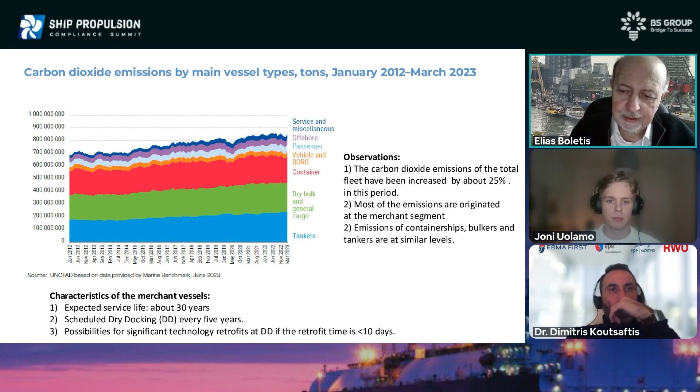So what we need to do is reduce these emissions and revert the trend, which indicates that in spite of the COVID period, the emissions are continuing to increase.

I have a slide which might be a little bit too busy, but it gives a very good overview of where we are in the marine sector: 37,000 ships, the overwhelming majority based on conventional fuels. Every year, what we supply as new is approximately 1,300 ships. So in order to replace the 37,000 ships with ships of new technology, it will take a considerable amount of time.

Another important comment is that if we look at fuel consumption, right now the conventional fuels consumption is 220 million tons per year. In order to replace that quantity with new synthetic fuels and so-called advanced low emission fuels like methanol, ammonia, and hydrogen, we would need very significant quantities. Clearly, in the year 2024, 2025, during our period, the availability of these fuels is the problem.

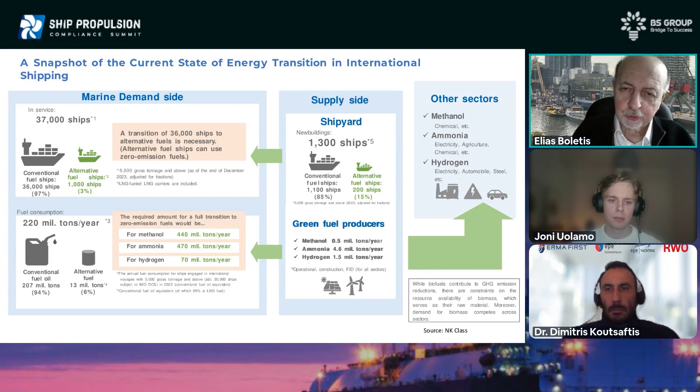So if we talk about changes in the marine sector, clearly the expectation that new fuels would solve the problem needs to be seen very carefully, because we are not producing enough green fuels to help invert the trend and improve the environmental performance of the marine sector. Moreover, several of those fuels are required also by other sectors, so we are not the only users of those fuels.

Clearly we see that the fuel transition will take some time, so we expect that new fuels will play a role, but also a lot of emphasis on other technical options shown in the middle of the slide, which include energy-saving technologies, wind assist propulsion, and onboard carbon capture and storage systems.

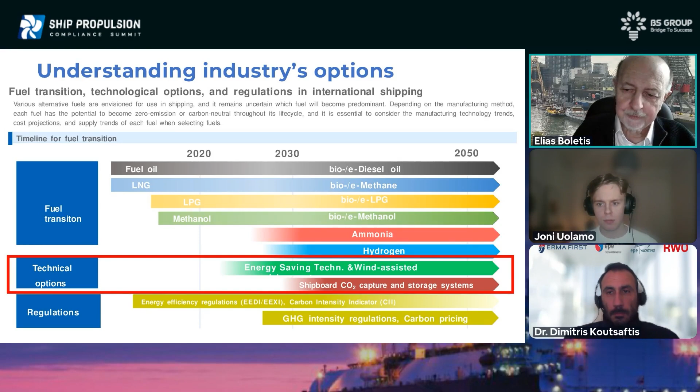Carbon capture and storage systems is the subject of today, and it is a way of improving the environmental performance of our vessels. If we see the situation with fuel and the increase in energy demand year by year, based on an assumption of this increase, clearly fossil fuel is going to stay for quite a significant amount of time.

So we don't replace the vessels fast. The new fuels, methanol, ammonia, are coming at the late side. The reduction of emissions needs to take place sooner, and the available solutions we have are indicated in the middle of the slide: carbon capture, energy efficiency improvement, biofuels, wind propulsion.

These are the solutions that we have in our hands. The solutions have two advantages: we can start immediately the decarbonization, we don't need to wait.

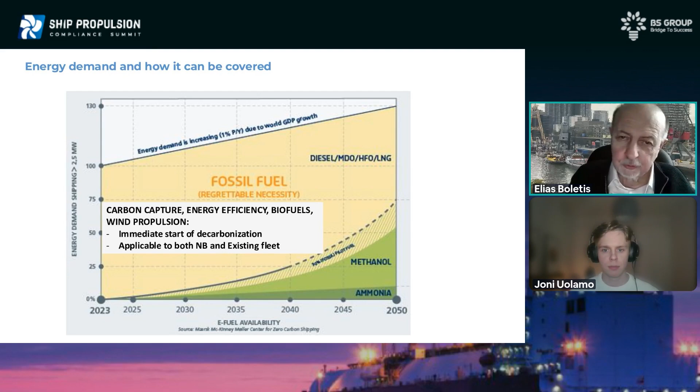The second fact is that they are applicable to both new built and existing vessels, because as we've seen earlier, 1,300 new vessels per year are not sufficient to change the trend. We need to do also actions on retrofitting to existing vessels.

If we see the legislation, it is distinguished by compliance measures like the IMO MARPOL carbon intensity indicator, where vessels are distinguished in 5 categories. We need to say that unfortunately till now the legislation has not advanced significantly to incorporate the onboard carbon capture rules. We are expecting that this will happen in early 2025.

But we see that the regulation is not helping us drive the activities correctly. The regulation will be arranged, will come, but we don't have right now the rules fully applicable.

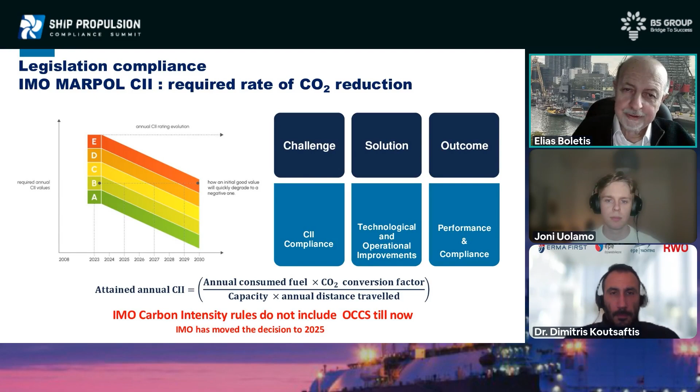If we see now the rules from the European Union, the legislation on the EU ETS that many of you are quite aware of: for the EU ETS, there is a provision that no allowances need to be paid for carbon capture, provided of course that a few measures are followed.

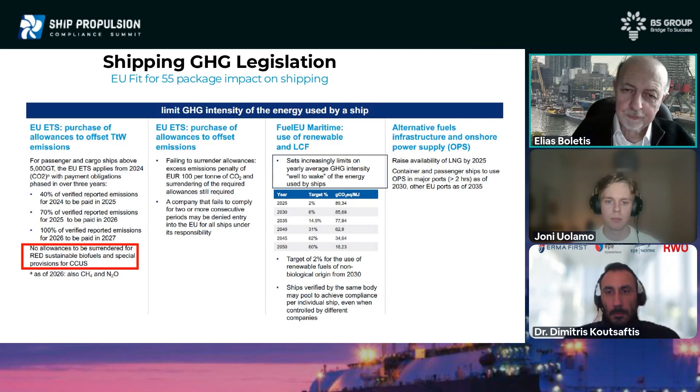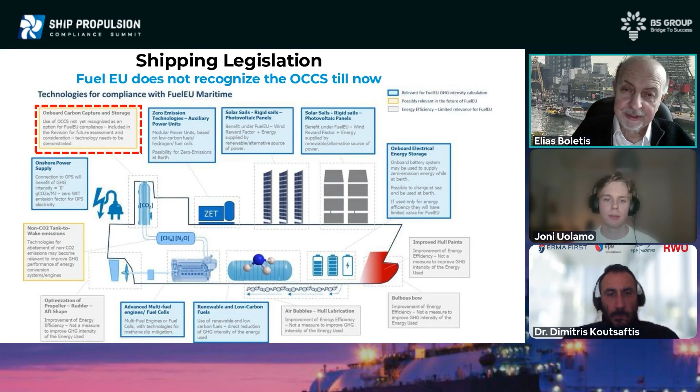So the EU ETS is recognizing carbon capture, but Fuel EU, unfortunately, is not yet recognizing carbon capture as a way of improving emissions. What I'm trying to say is that the legislation is underway, and we will need the legislation to support the actions for implementation of new technologies.

And it produces 3 times that quantity in carbon dioxide. 1 kilogram of fuel produces 3 kilos of carbon dioxide. That means this important aspect needs to be taken into account: you need to design the vessel correctly, and you need to be sure that the interaction between the engine, the other systems on the vessel, and the carbon capture works in the best way.

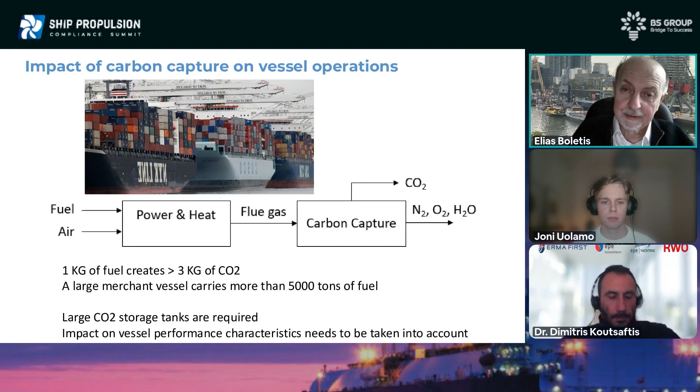Supporting the effort to capture and store the carbon on board of the vessel, so you need space. You also need to provide additional energy in many cases to be able to convert, to liquefy the gas, and all these are issues which need to be taken into account by all disciplines in the marine world.

There is a pre-combustion capture as a way forward. This is applicable only on LNG vessels. It's a solution for LNG, where actually the LNG, before entering into the engine, a partial quantity of the LNG can be converted to hydrogen. This creates carbon dioxide, which needs to be stored separately.

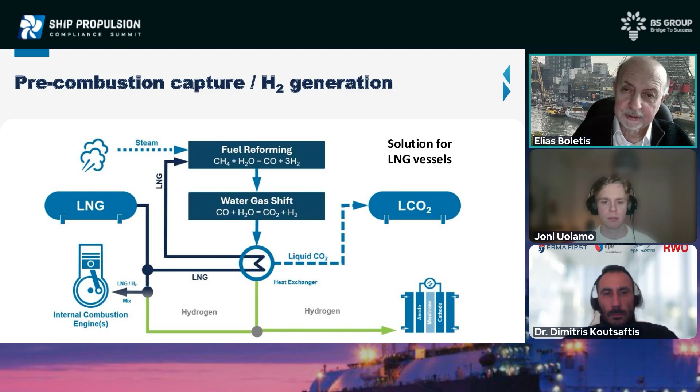But in our case, we are talking primarily about the post-combustion carbon capture, where the gas emitted from the main engine undergoes a process on board of the vessel, and then the carbon dioxide which is collected is stored separately.

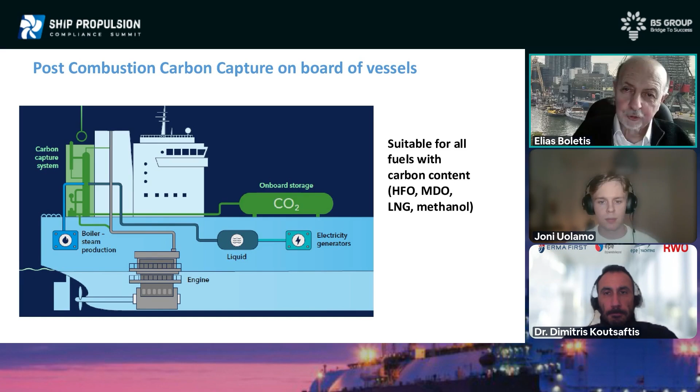So this is the main subject of the presentation of today, and the two presenters will give you quite a lot of details on the subject. I needed to mention that there are currently quite a number of pilot projects.

One of these projects is the project Remarccable. It is supported by a number of companies, you see the main parties involved at the upper side of the slide. What I would like to say, what has been shown and published from this work, is that in order to reduce the carbon dioxide, you need some additional energy.

So you are increasing the fuel consumption, and this is actually needed in order to liquefy the gas. At the end, you have a significant advantage of carbon capture reduction. However, you have also an increase on fuel consumption. How much is this increase?

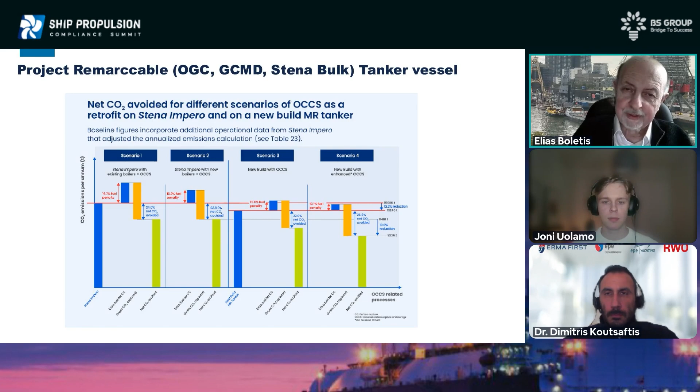This depends, of course, on the application, depends on the way that you have sized the system, and depends on the fact that on a new build, you have more opportunities than for a retrofit project where the systems are already sized. Personally, I've been involved in quite a few activities where we tried to find out the cost of the system relative to new alternative fuels.

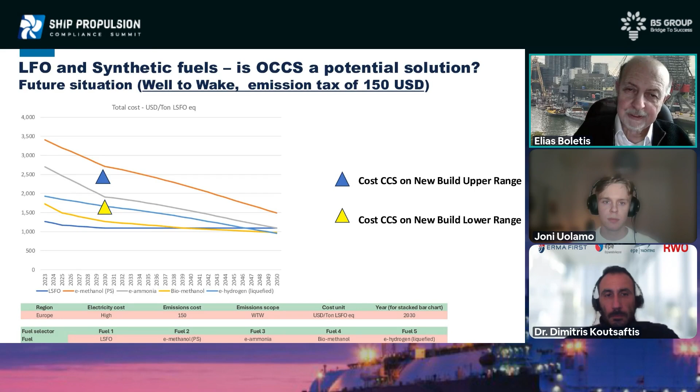So we did some work where the McKinsey Institute tool has been used, comparing the projection of the new synthetic fuels with carbon capture. So what we see is that the cost of carbon capture is an issue which needs to be addressed. We expect with the pilot projects that we have in front of us that the cost will be significantly reduced in the coming period. My personal view is that carbon capture, together with energy saving devices, can be integrated, providing a solution.

The actions can take place every 5 years when you have dry docking, where a combination of measures, where carbon capture certainly plays a potential role, can allow you to improve the vessel, reduce the carbon dioxide emissions, and fulfill the requirements of the authorities.

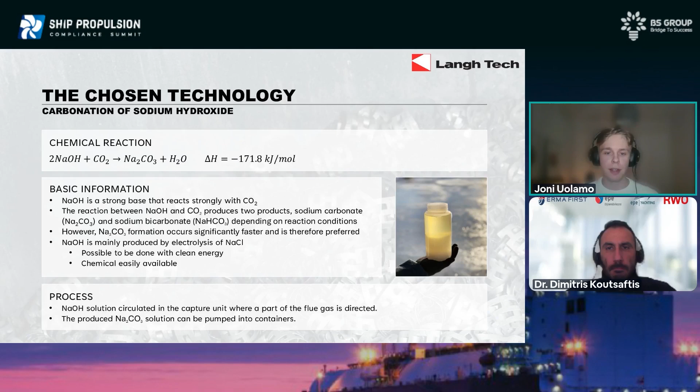But sodium carbonate is formed much faster, and the reaction kinetics for this reaction, which is shown here on the slide, is much faster, which really reduces the equipment size. Therefore, sodium carbonate is preferred in our technology. And one particularly important factor is that sodium hydroxide is produced by electrolysis of sodium chloride, which can then apply green electricity. And this is important from a life cycle assessment point of view.

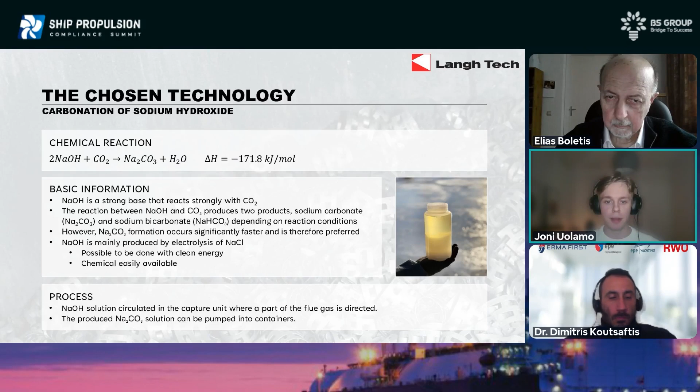So the process is rather simple. We have a capture unit where we direct a part of the exhaust gas, and then we have countercurrently flowing aqueous solution of sodium hydroxide, and they form together sodium carbonate in the capture system. What can you do with the product sodium carbonate then? Well, there are a number of industrial applications for this product, for example, in glass manufacturing, detergents, pH regulation, water softening, and exhaust gas cleaning.

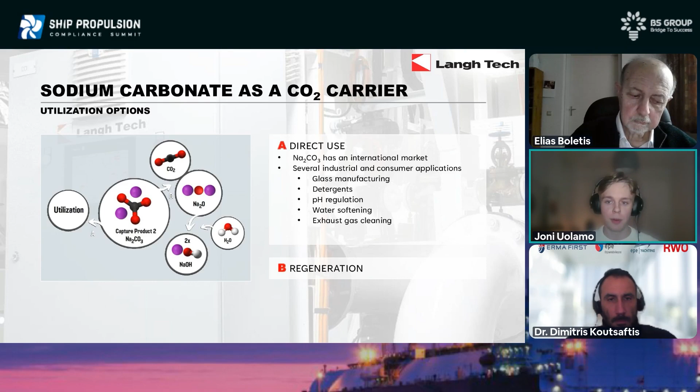And exhaust gas cleaning means in this context, for example, so-called waste-to-energy plants, where you burn plastic waste, low purity fuels, basically, and they can form different kinds of acidic components in the exhaust gas, and they have to be neutralized some way. So that is a particularly interesting way of utilizing sodium carbonate, because the product purity requirements are rather low as well.

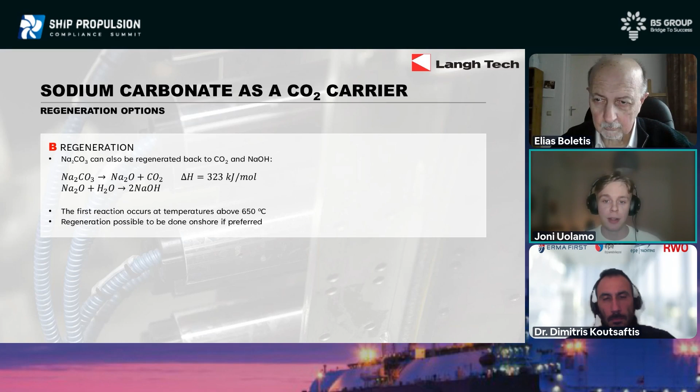The second option is, of course, regeneration, which can be done on land. And this is shown here in these two reactions. First, you decompose the sodium carbonate, and then you dissolve the sodium oxide in water, forming sodium hydroxide again, which can be further used to capture more CO2. But this first reaction requires rather high temperatures, and due to the market value of the sodium carbonate which is produced, we have been focusing on a carbon capture and utilization concept where you can sell the product. This also makes sense from an economical perspective.

Some technical details and numbers of our technology. So basically, because we are not regenerating the solvent, we always need more sodium hydroxide to capture more CO2. And this number is given here on the left-hand side. You need around 3.6 tons of 50% industrial solution of sodium hydroxide to capture 1 ton of CO2. And at the same time, you produce 30% solution sodium carbonate in an amount of 8 tons per ton CO2.

We have a pilot plant on one of Langh's vessels, and we have been operating with it since last spring. And these tests have shown that the energy that is required for the capture step falls into this range. And this is quite marginal due to the fact that we do not regenerate the solvent and we do not compress the CO2. So this includes basically the exhaust gas fan and then the liquid circulation pump. And this all leads to the fact that about 42% of the dry product sodium carbonate is CO2.

Here underneath you can see one diagram showing how much space is needed for the product when it's produced. So if we take, let's say, a capture unit that captures 600 kilograms of CO2 per hour, this can mean, depending on the vessel, around 20% of the total emissions. And you operate with that vessel around 100 hours. So it makes then 60 tons together. And you can read from the diagram that the amount of space needed is then about 400 cubic meters.

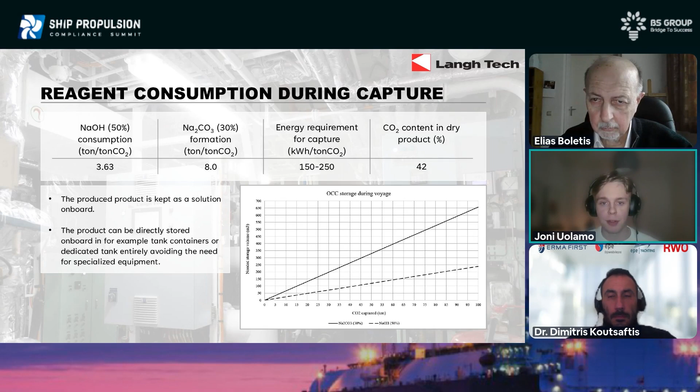And basically, when you store the sodium hydroxide or caustic soda as well, the same storage units can be used. So here you can see that the sodium carbonate storage need is then the final determining one, which determines how much space is totally needed. As I mentioned, we have a pilot plant on one of Langh's vessels, and here are two design pictures of it. So it's a modular structure based on 5 different modules.

At the bottom, we see a liquid containing module where we have the solution, and then it's circulated to the top of the capture unit. And then we have 3 middle modules with packing beds and nozzles, and then of course a demister on top of the unit. And it's attached to the main exhaust gas pipe of the vessel. And if you look at the picture on the left-hand side, you also see a SOx scrubber underneath the capture unit. So that is used to capture the sulfur emissions, or most of the sulfur emissions. And then the more pure gas is directed into the capture unit, or a part of it at least.

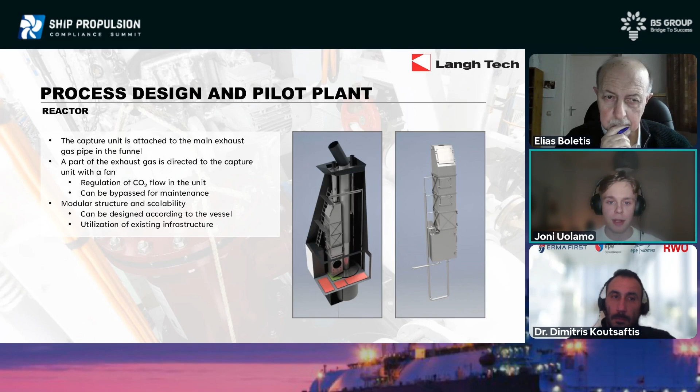And unlike the pilot plant, in full-scale carbon capture systems, we have a slightly different way of operation. Instead of only one liquid container, we have two process water tanks, which can be used alternatively, so that you start with one process water tank and a fresh solution in that. At the same time, you can empty the other one and fill it with fresh solution. And then you do basically the same the other way around. So this is the way of operation when you want to operate continuously.

Then we also have, of course, CO2 measurement before and after the capture unit, and also exhaust gas flow measurement. So based on these values, you can determine how much CO2 has been captured in the unit. And the same can be proven by analyzing the product, of course, when analyzing how much carbonate has been produced.

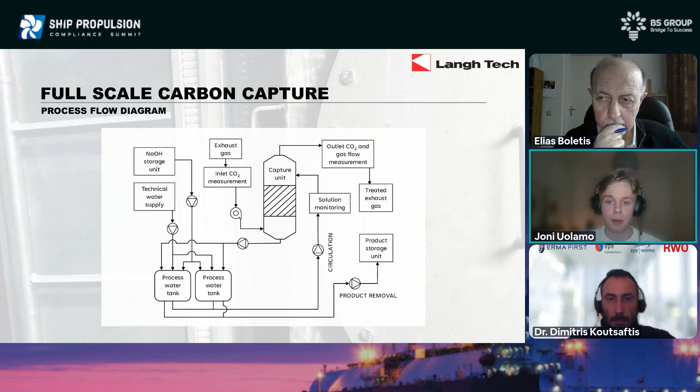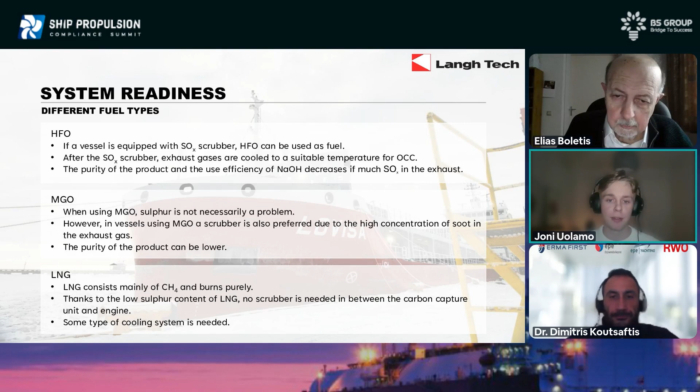Depending on the fuel that is used, you need different kinds of systems for pre-treatment of the exhaust gas. With HFO, you basically anyway need a scrubber to get most of the sulfur out of the exhaust gas, and with MGO, the situation is basically quite the same. For LNG, no scrubber is needed because the sulfur content is lower, but some kind of cooling is needed because the carbon capture system operates at about 40 to 50 degrees Celsius. So the exhaust gas has to be cooled down in some way.

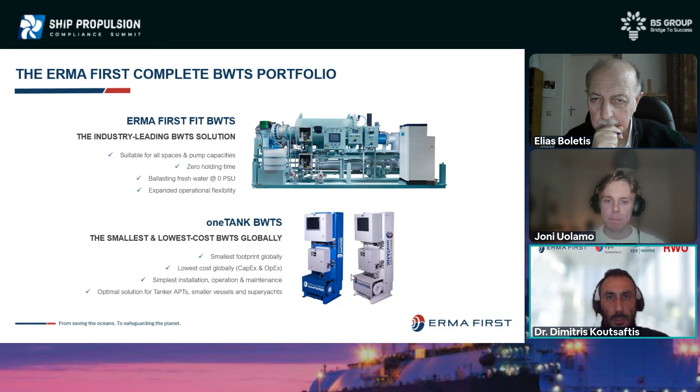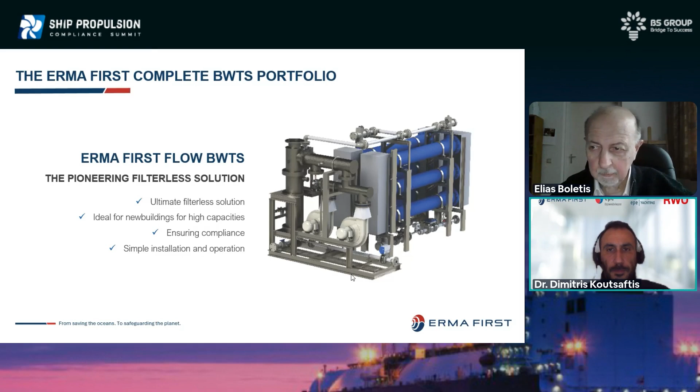Regarding our decarbonization solutions, we have our ERMA First Blue Connect, which is our alternative maritime power product, which in essence has an interface when the vessel is at berth in order to get power from the grid at the port instead of running the auxiliary engines.

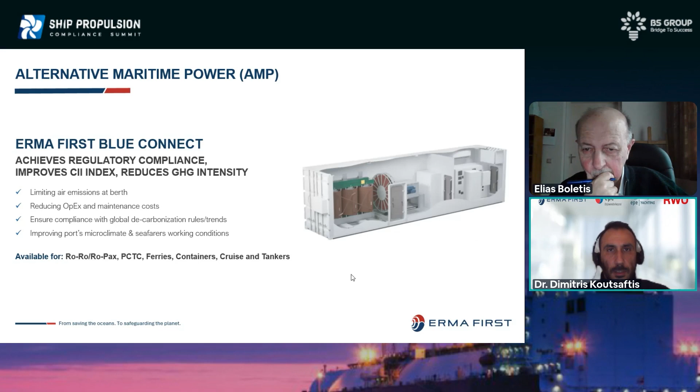We moved on to our energy-saving devices, and specifically the FlexCap, which is already available in our product portfolio, and the Flex Ring and Flex Fins, which are coming. These are devices that are installed on the vessel, and their purpose is to optimize the flow in such a way in order to reduce power consumption and optimize CII and EEXI.

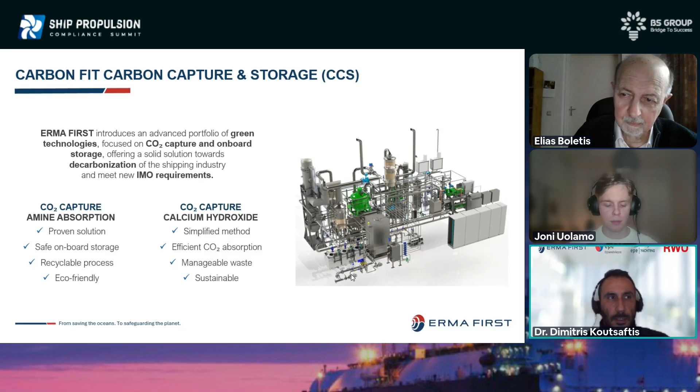And we move on to our carbon capture solution, where we have focused on two technologies. Both technologies are based on absorption. We have our amine-based solution, followed by liquefaction of the CO2, as well as our calcium hydroxide solution, which is a much simpler method, especially designed for vessels doing very small voyages for short sea shipping.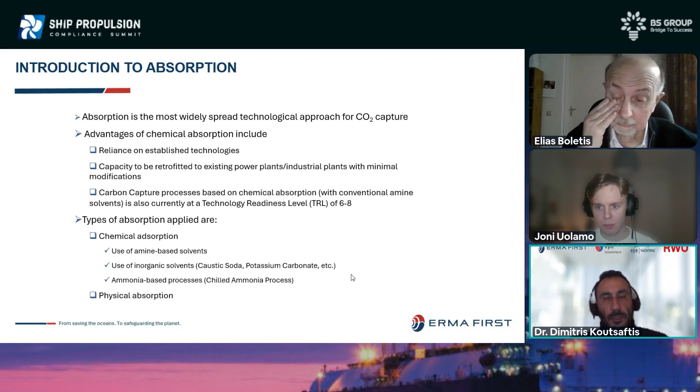Today, I will speak to you exclusively about our amine solution, which is again based on absorption. And absorption as a whole is the most widely spread technological approach for capturing CO2. It has significant advantages compared to other technologies. Its main advantage is that it can be retrofitted to existing installations with minimal modifications and a very high technology readiness level.

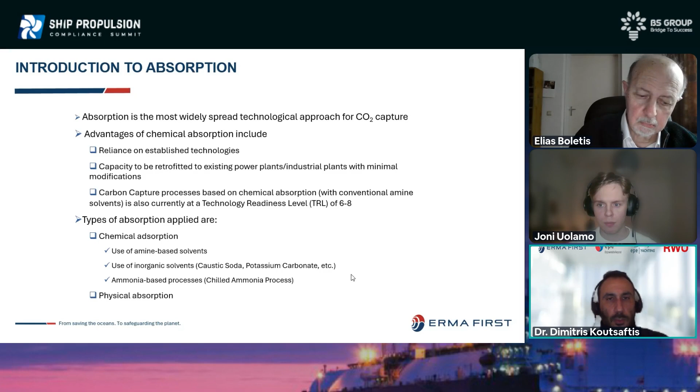And the types of absorption: first of all, we have the chemical absorption, where there is a reaction of the CO2 with the chemical solvent. So in this category, we have the use of amine-based solvents, as we have discussed up to now, the use of inorganic solvents such as caustic soda, potassium carbonate, etc., as well as ammonia-based processes. And there's also the case of physical absorption, where there is no chemical reaction of the CO2 with the solvent, but only dissolution in it.

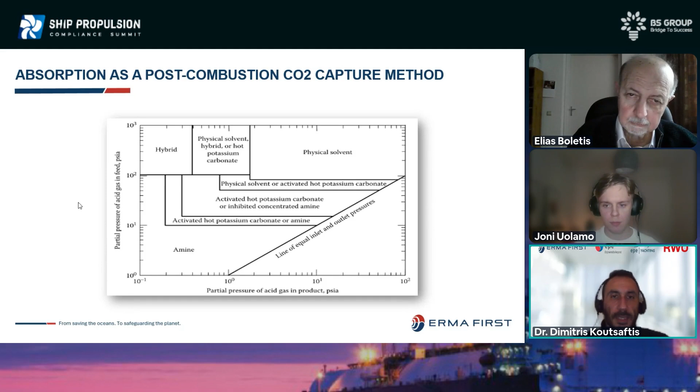If you look at this chart, at the vertical axis, you have the partial pressure of the CO2 in the feed of the chemical plant, and on the horizontal axis, you have the partial pressure of the concentration of the CO2 at the outlet of the plant. So the emissions from marine engines lie in this region here. So it is quite obvious that the amine technique is the one that gives the highest selectivity for capturing CO2 from marine engines.

So how does absorption with amine-based solvents work? It's basically a cyclic absorption and desorption of CO2, usually performed by altering the temperature, doing the temperature swing, as we say. High CO2 absorption capacities between 90 to 95% have been reported in the literature and have been demonstrated during various pilot plant campaigns, as well as actual plant operation. However, this high absorption rate comes with a cost, and this cost is the high energy required in order to regenerate the amine and strip CO2.

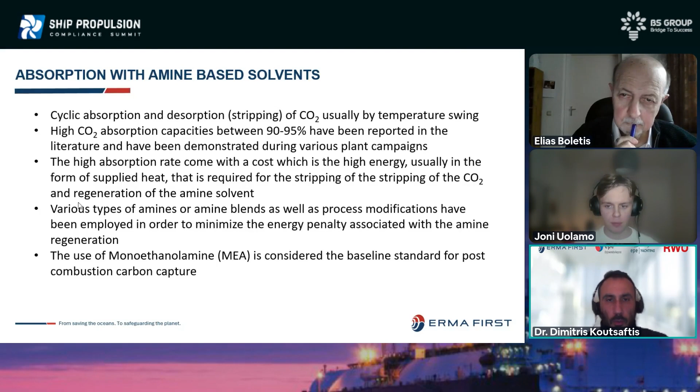Various types of amines and amine blends have been proposed and used in order to minimize this energy penalty. And traditionally, the use of monoethanolamine is considered as the baseline standard for post-combustion carbon capture, and it's used quite extensively even now. Of course, capturing CO2 using amines is not a new technology. It goes back to the 60s and 70s.

So the big challenge is the marinization of the technology. And certain challenges had to be addressed, such as the minimization of footprint, the variation of the exhaust gas composition and the flow rate, the operation under marine conditions, and more specifically inclination, vibration, etc. The complexity, because as you will see, we are speaking about significant complex equipment. The exhaust gas pretreatment, which is necessary in order to bring the exhaust gas to the appropriate conditions in order to react with the amines, and of course the minimization of heat requirement for the regeneration of the amine.

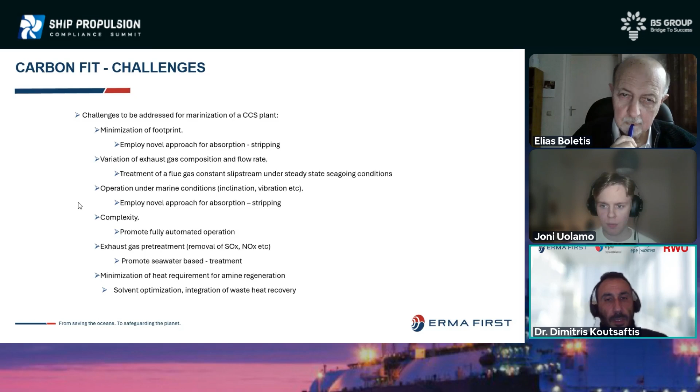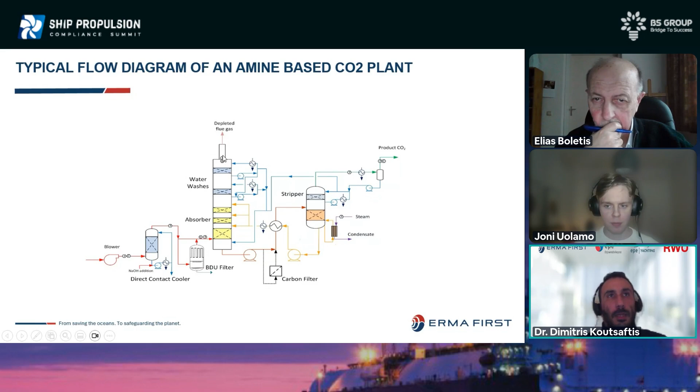Above the absorber, there are usually one or two water wash sections. These are there in order to knock out any amine emissions, as well as to keep the plant in water balance, because the reaction of the flue gas with the amine is exothermal, so a significant amount of water is being continuously drawn from the amine towards the exhaust gas. And for this reason, the water wash sections cool down again the exhaust gas to 40 to 50 degrees, as we said here, 40 to 50 here as well, in order to keep the plant in water balance.

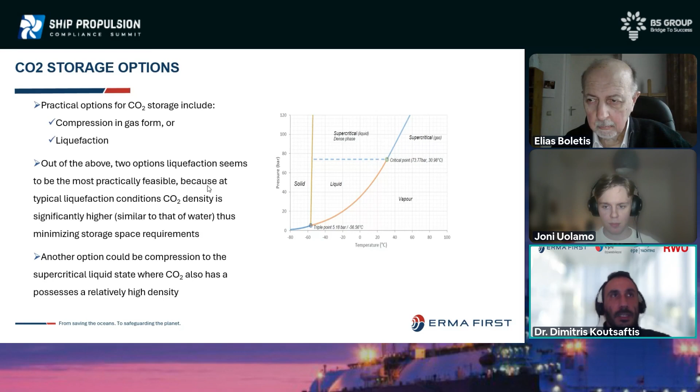Regarding the CO2 storage options, there are basically two options: either compress it at high pressures or liquefy it. And out of the two solutions, the one that is most practical for onboard use is liquefaction, due to the fact that liquid CO2 has the highest possible density, so it occupies the least possible space on board. So,

coming to the capture part on board, the CO2 that comes out of the stripper is compressed in a two-stage compression. The pressure here rises to approximately 15 to 18 bar. So the CO2 is firstly compressed. Any water, after the cooling processes, is separated and returned to the amine plant. Again, there is a cooling process bringing down the temperature of the CO2 stream to approximately 10 degrees Celsius.

It's then directed to an activated carbon bed where volatile organic compounds are knocked out, and subsequently to a desiccant dryer where moisture content goes down to less than 30 ppm in the CO2 stream. And after this, the liquefaction and further purification stage takes place. This is a process where non-condensable gases such as nitrogen and oxygen entrained in the CO2 stream are knocked out, and we have liquid CO2 exiting the plant with a purity of 99.9%, food grade purity.

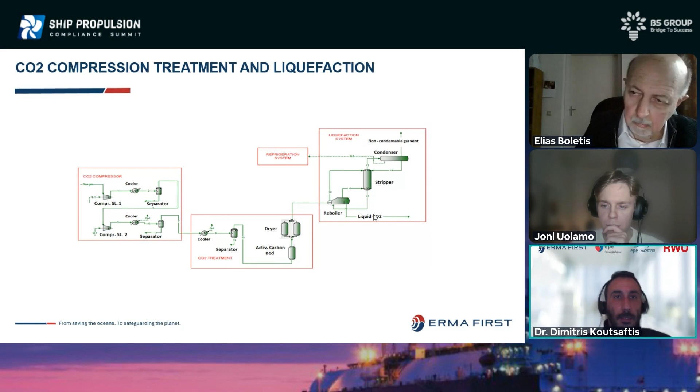As for how the plant sizing procedure takes place, we have the vessel details submitted by the client. We have a pre-assessment done internally through our relevant department. We can run a techno-economical feasibility study regarding the impact of the plant, especially in terms of CII reduction over the years, as well as provide a clear estimate of steam, power and fuel consumption. And then a decision along with the vessel owner is taken on which system capacity is installed.

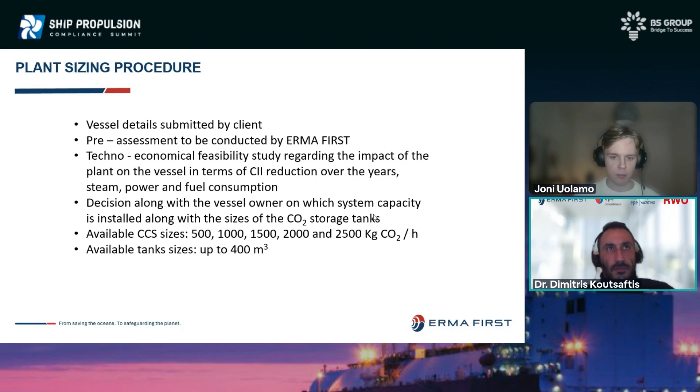We have available capacities ranging from 500 kilos to 2,500 kilos per hour of CO2, and available tank sizes starting from 50 cubic meters and going up to 400 cubic meters.

The advantages of our system is that it has an extremely low footprint due to the special design of our absorber and stripper modules. The performance of the absorption and the stripping are unaffected by the ship's inclination. We have the possibility to install the system in vessels already equipped with scrubbers. Our installation is modular and consists of several skids that are interconnected.

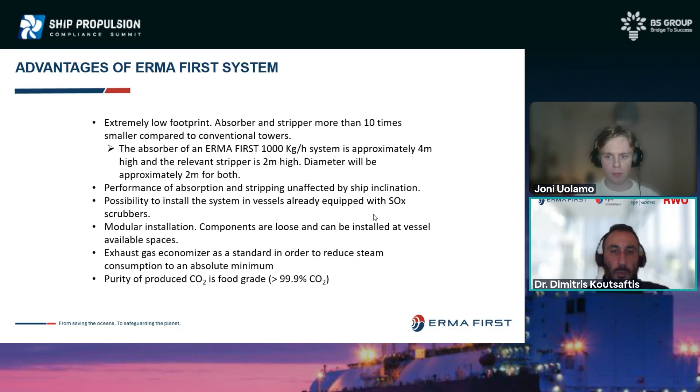An exhaust gas economizer is used as a standard in order to reduce steam consumption to an absolute minimum. And of course, the purity of the CO2 produced is of food grade, as I mentioned earlier.

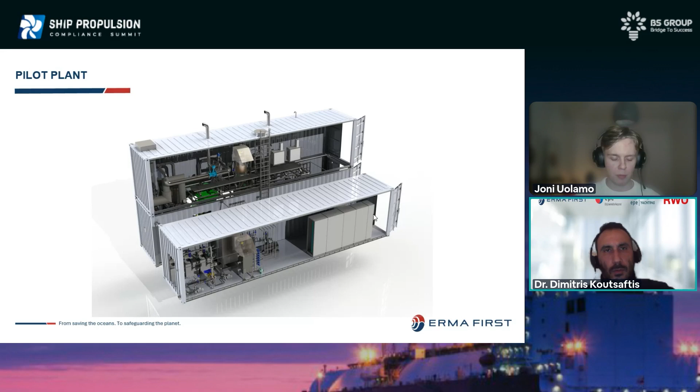Thank you. Thank you, Dimitris.

I had a question regarding the application of the system, but you mentioned at the end of your presentation that there is an application coming on board of a vessel. Yes, we have a pilot plant. It's nearly complete in its construction part. And we expect the installation and commissioning to take place at the beginning of March.

Okay, thank you. Then you mentioned also the technology readiness level of the application. The technology readiness level for land installations is indeed considered quite high. Now the main issue for us is the specifics of the application in the marine world, where you have the main engine, and in reality we are requiring more power to feed the system. We have different conditions on the main engine, and we have the issues of storage and transportation. So the overall picture for marine might be different than the picture for land installations, where the technology can be considered as reaching series production and a kind of maturity.

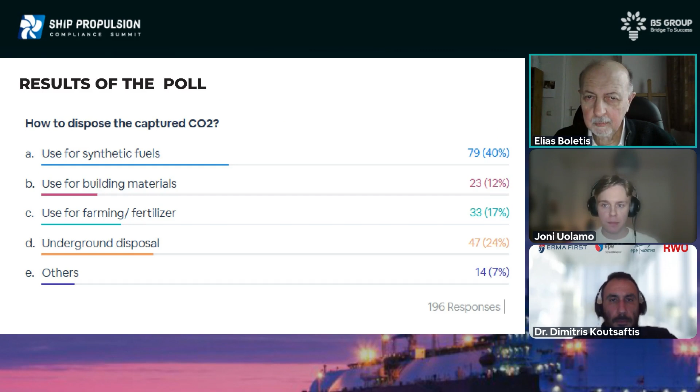Yes, did we discuss this? Yes, we discussed it, indeed. Okay.

Any comment on the polls? Any final comment on the polls from Joni and Dimitris? Is this reflecting your experience as well?

Regarding this part, no, I voted for A, actually. I am quite certain that CO2 capture is one of the key technologies, if not the one that has the highest impact compared to all other technologies regarding reducing CO2 emissions.

Yes, I also agree. CO2 capturing is something that can be done in the short run, and also have a big impact in the larger or longer run. So yeah, for sure, this is one of the solutions. Of course, there is no silver bullet. You cannot solve this big problem with only one solution. So therefore, I think this is part of the solution, so to speak.

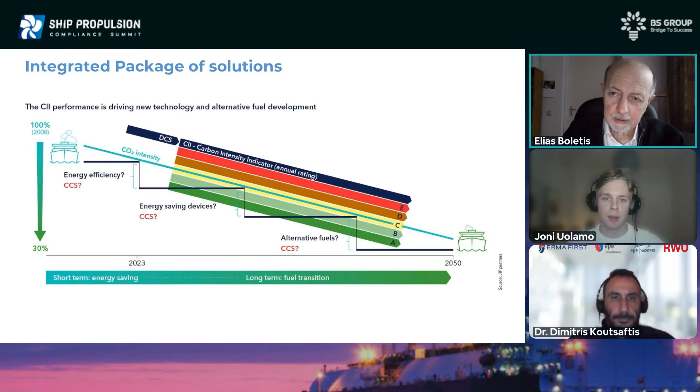From my side, I have some concluding remarks from my initial presentation that I propose to go through. What I tried to bring as a message is that we have a challenge in the maritime sector - the path to decarbonization. The expectation that biofuels and synthetic fuels would solve the problem is found not to be time-wise appropriate. The supply is and seems that it will remain insufficient. Fuel prices are volatile, and the introduction rate of new builds is quite low to keep up with the emission targets. So we have a problem which needs to be addressed for both new build and retrofit, and the solution fits both.

Onboard carbon capture seems to be a good alternative to reduce carbon emissions. One important thing is that all fuels which have a carbon content are possible to be addressed, so we are addressing all fuels except ammonia and hydrogen. Another possibility is that onboard carbon capture can be well combined with other energy-saving technologies. If we talk about the energy increase due to the needs of the system, we need to find a total, integrated solution where the overall performance of the vessel would be benefited the most.